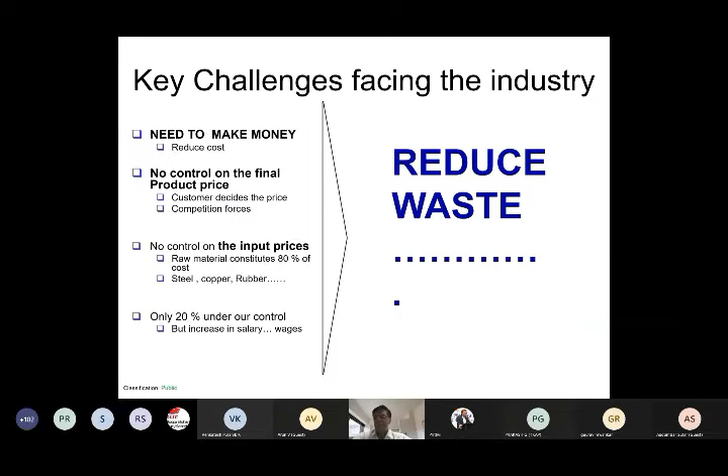The main thing we are trying to say is to reduce waste. In all our areas, in all our work today, how to reduce waste is the key factor we are all working on. So there are different types of waste, starting from today - if you're working from home, underutilization of the employees, overproduction, and waiting time. A lot of wasteful time is in terms of inventory. Transportation - I talked about the transportation cost - excessive movement inside a factory, outside a factory, and a lot of importance not given to motion ergonomics, and of course the quality.

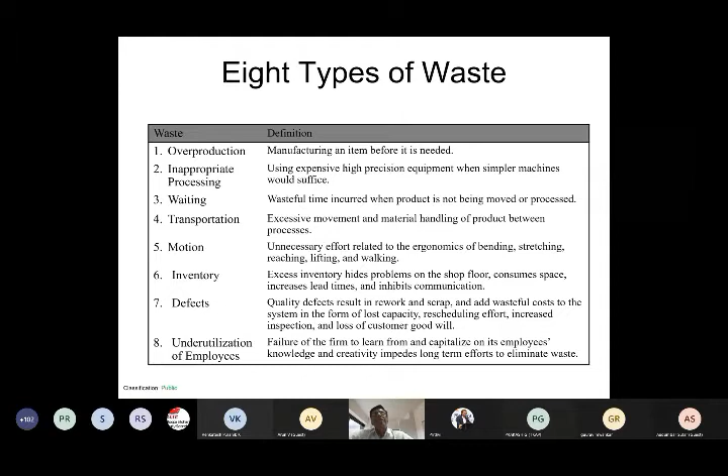So all the waste we need to attack, we need to see how to reduce it. Similarly, what are the types of losses? Losses inside a factory include things which can impede equipment efficiency, like failure losses, startup losses, minor stoppage losses, speed loss, defect rework, downtime, and in terms of production resources, again operating motion loss, logistic losses, and of course tool breakage loss and yield loss.

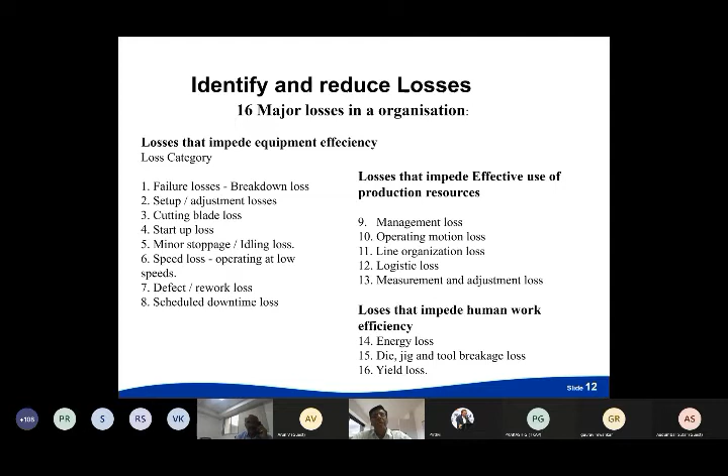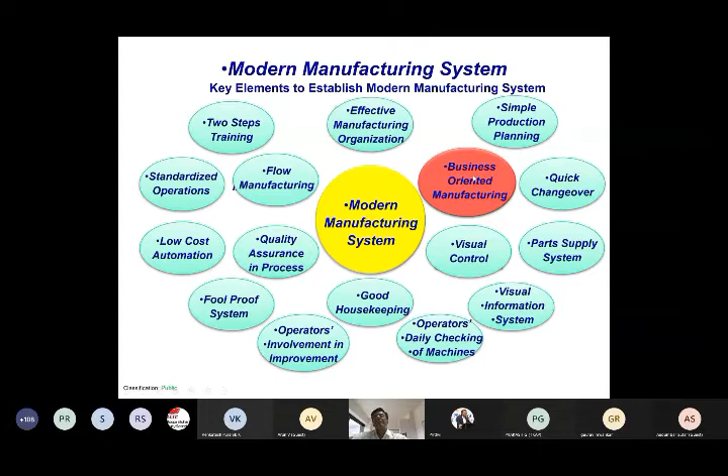So to work on these losses, to work on the wastages, we are trying to talk today. There are many tools available - for example, JIT, we have got Lean, TQM, TPM, SMED, and all the new tools, which are all existing tools, but all are interlinked to improvements, and all are linked to business-oriented manufacturing. I talked about the business of making money. So all the modern systems, whether it's flow manufacturing or low-cost automation, simple automation, quick changeover, visual management, are all towards business-oriented manufacturing. And one such tool is TPM.

So coming back to the challenges in the industry, it's about reduction of waste, reduction of losses, and improvement through 5S by involving total employee involvement and bringing in TPM. So today's topic will talk about TPM and 5S and their implementation in industry.

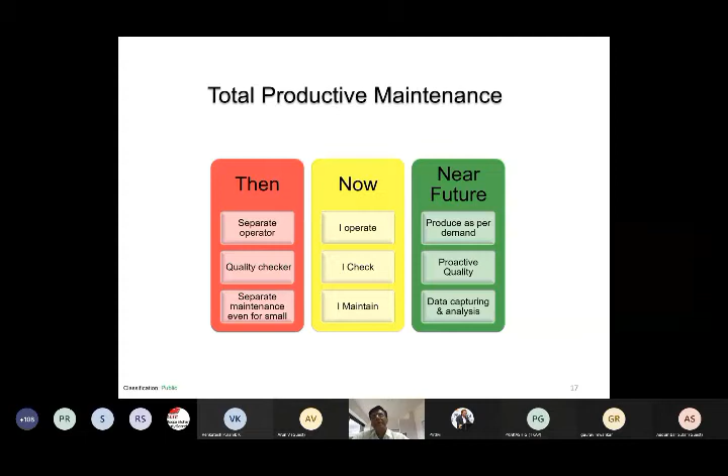So what is total productive maintenance? Earlier there used to be a separate operator, separate quality check, and separate maintenance person even for small improvements. Now it's changing to 'I operate, I check, I maintain' in TPM. In the near future, I operate to deliver as per demand, I proactively check and give quality level, and I maintain by bringing IoT and data capturing. So the change is from separate operator to 'I operate, I check' towards new areas of IoT, but the basic is still productive maintenance or TPM.

This is how we go from now to the near future. Similarly, looking at the 8 pillars, earlier for 5S we had a separate team. Now each area is maintained by an individual and a team. In the near future, shine and 5S business benefits are shown even in 5S itself, so it's important to know there is business benefit including 5S.

In terms of Kaizen, Kobetsu Kaizen, we earlier used to practice it in a basic way. Now it has increased in level, going towards digital and visual KK. That's the change happening in the second pillar.

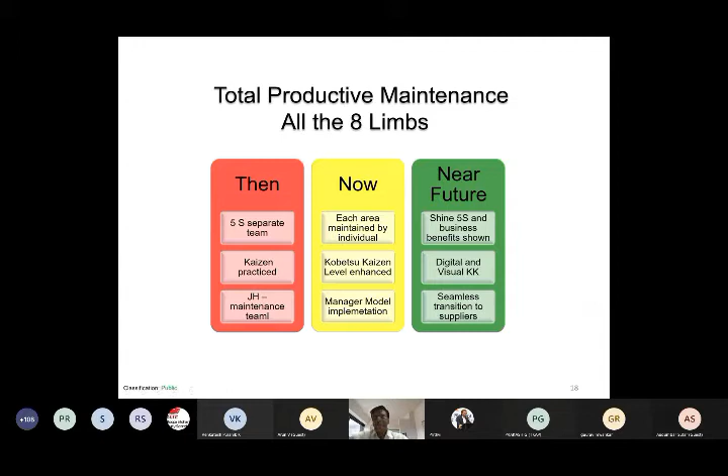Third, in JH at the operator level, involvement of everyone including the manager model, and seamless transition to suppliers, which gives end-to-end benefit. Similarly in planned maintenance, earlier it was done by the maintenance team, now it's done by the operator himself, 'I maintain', linked towards IoT for machine proactive checks.

In quality, the QM pillar, earlier it was the quality staff and inspection for approval. Now the operator does the check, ensures zero defect, and this extends to all suppliers. For new products, we bring learnings from the beginning and incorporate them seamlessly, interlinking with PFMEA and DFMEA.

So what's happening is it's becoming like a system, where we are able to implement, sustain, and then grow the development of the industry itself. In terms of office TPM, earlier it used to be separate from the factory. Now supplier, office, and logistics are brought under TPM and linked with IoT in the near future.

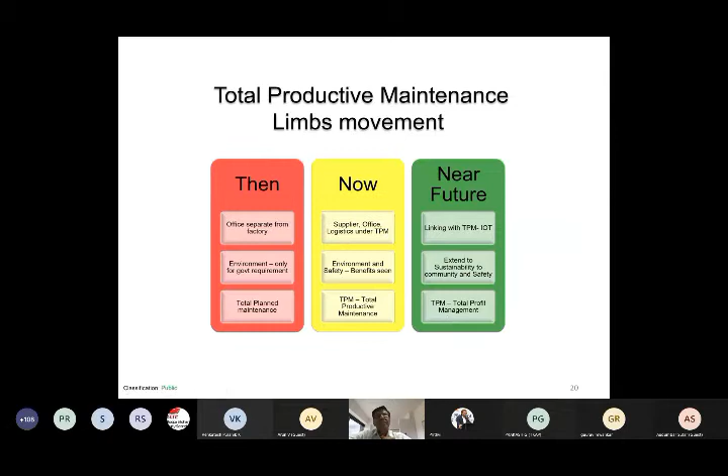On environment, earlier we used to just meet government regulations and we were happy with that. Now environment and safety benefits are seen, and we talk about extend to sustainability for community and safety. And total planned maintenance as total productive maintenance has changed to total profit management. This is the way the entire change in TPM is happening for the future.

Because of this, even the machine tool industry has changed from simple SPMs to flexible chain setups to deliver, from quality control to process capability to zero defect, and from batch production to agility and variety in our lines.

And the next is IoT-based end-to-end improvements, sustaining zero defect, proactive participation in new products, and bringing new technology. I was talking about EV technology and how to bring new technology from the OEMs, and how to integrate TPM, TQM, and Lean to make the Toyota system or TPM-TQ system, and capturing data analysis and improvement to get business benefit.

So I think I'll stop here, and probably Parashuraman can take it to the next level, and I'll come back to you on each pillar of TPM.

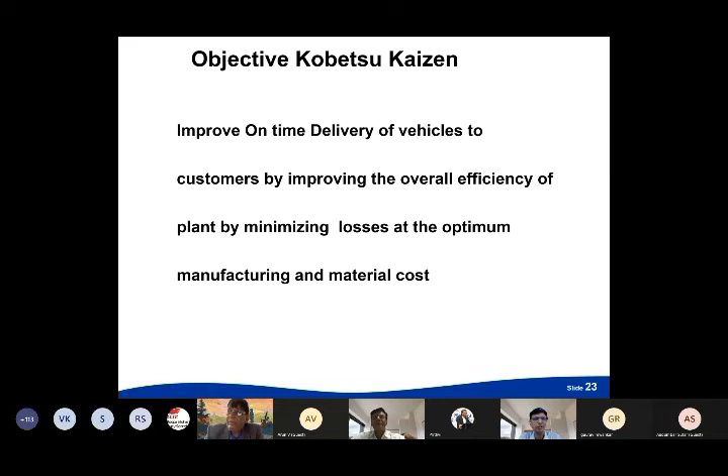Thank you, sir, thank you very much for setting a very good overview of the TPM session. While we got the overview now, to actually make it happen, we need to understand the details of it. So I hereby request Mr. Parashuraman to take over the session, sir.

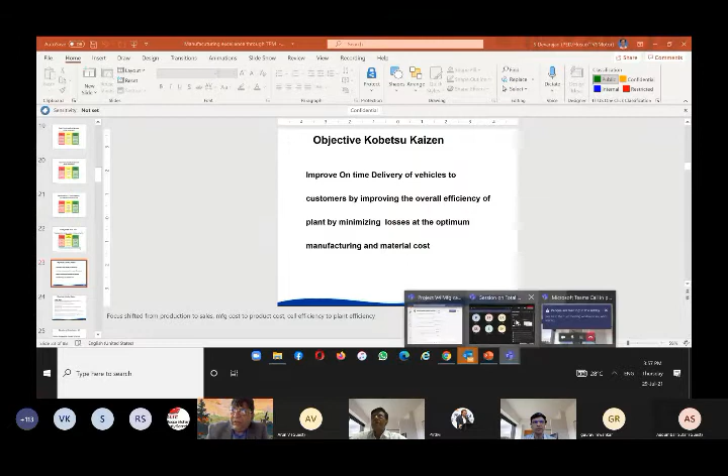I will now start sharing. Just a minute, I think. Yeah, thanks, Hi, sir. Prakash ji. Thank you, Dr. Devarajan, for a wonderful insight. It's made my job much simpler.

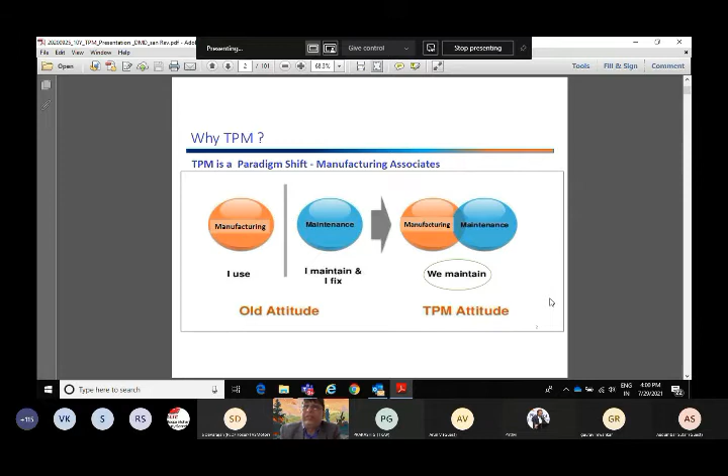So basically, TPM is a method to maximize equipment effectiveness through total employee involvement. As I said, it's a collaborative approach, and basically it means management together with the shop floor production associates and the maintenance team.

You can see the right side - the car as well as the driver, both should be in top shape to win the race. Therefore, the car should be in top condition, the driver also should be in top condition, then you can win the race.

If you look at the synonyms, on top you can see the baby's photo and at the bottom, the machine. So the machine is similar to the baby, and the parents on top are nurturing it. Here, the operators are similar to parents - how the parents take care of the baby, the operators take care of the machines. The role of physician is nothing but maintenance. Whenever there's a problem, diagnostics or problem solving, the physician or doctor enters. This is a major shift in thinking. So what it means is accountability at low cost.

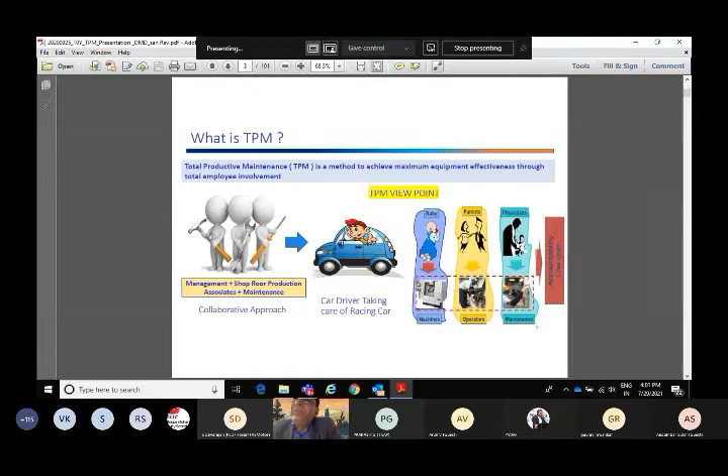So when I look at the TPM evolution, it goes like this. Before the 1950s and 60s, we used to have breakdown maintenance - typically reaction maintenance, whenever the machine breaks down, immediately you call the maintenance guy and they come and fix it up. Then evolved preventive maintenance in the late 60s, so even before a failure, some kind of health checks happened in the machine. It's a kind of preventive mechanism.

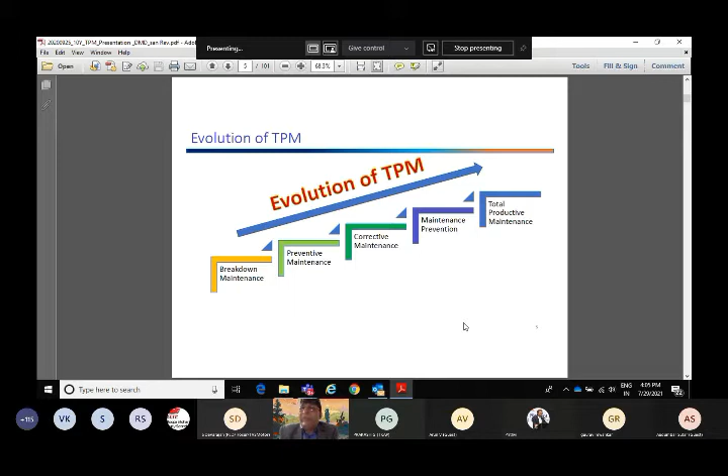The benefits: increased uptime of the machines, increased plant capacity, lower maintenance and production costs, lower defects, and enhanced job satisfaction.

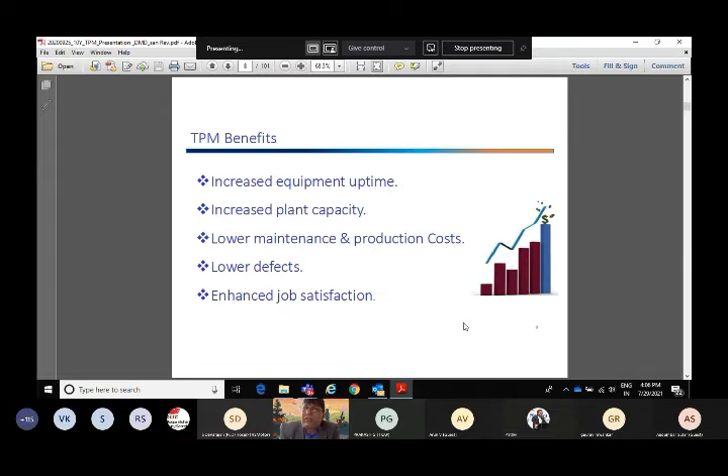I think the single most important thing in TPM is visualization. Everything should be made naked, which means the machines should be completely stripped open and everything is visualized. When you walk through a typical TPM plant, defect rates, delivery performance, daily rejections, supplier quality, machine breakdown rates, MTBF, MTTR - everything is completely visualized.

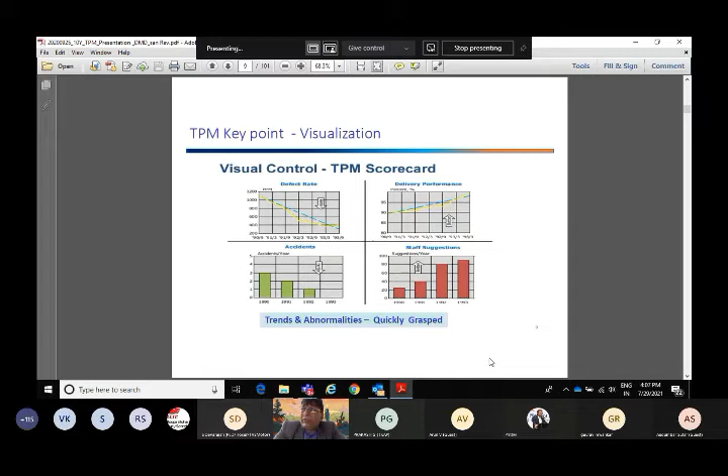Accidents starting from safety, then suggestions - it's an employee participation program. Everything is visualized so that everybody is able to see the trends and take adequate proactive countermeasures. So this is the starting point.

Again, visualization - everything is visualized in the form of pictures and physical platforms. For example, it indicates the direction of adjustments on the right side or left side, where to turn the knob. Quick, safe, and troubleshooting procedures are standardized, with visual controls to improve ease of operations. Everything is visualized, so there's no need to worry about what to do.

It is visual - you can see by eyes, hear by sounds, smell by your nose, touch by your hand. All these things are visualized in the shop.

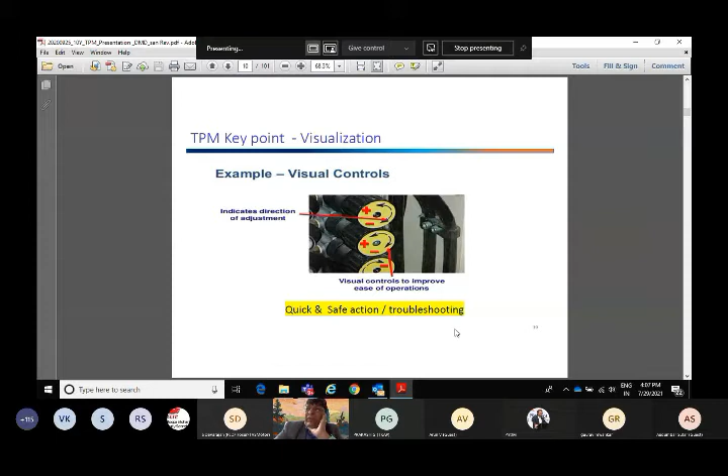I think TPM metrics, equipment losses analysis and OEE - Dr. Devarajan talked about all these losses, he talked about several losses. But in TPM, we talk about 6 big losses: the breakdowns and setups...

Then tool setup losses and minor stoppages. Minor stoppages, we call it chokotei in Japanese. Actually it's not a big breakdown, it's an irritation to the operator. For example, a tool waiting, some kind of coolant clogging, or the door not closing because a chip is entangled. You remove the chip from the door and it operates, but it results in 1 or 2 minutes of stoppage. Or let's say the coolant level is low and has to be topped up frequently because of leakages - that's an irritation, you have to top up the coolant and you lose time. That's what we call minor stoppage.

Then you have reduced speed loss. Speed loss is basically of 2 types: machine speed loss and operator speed loss. For example, the rapid rates G0 in X, Y, Z and the B axis have been reduced, from 50 meters per minute to 10 or 15 meters. I think that's what we call machine speed loss for a period of time.

The operator speed loss is loss of standardized work time. Operators get fatigued, or there are some cultural issues, slow motion operations, or union issues. Many things are collectively called the speed losses by the operators.

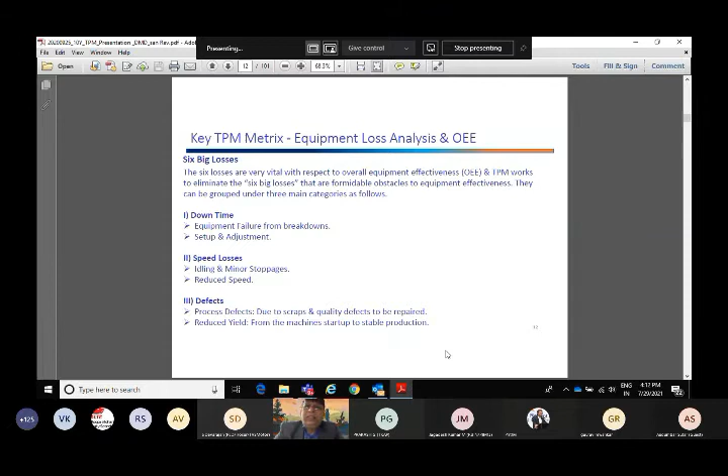Again, this is what we need to understand a little more deeply. I'll come to that later. I just thought I'll give you a big picture. Yeah, the six big losses I just explained. I don't want to touch much upon it.

So improvement goals, as I said, should be zero. Breakdown should be zero. Setup and adjustment losses should be minimal. Should set global targets - we talk about single minute exchange of dies on a global platform. And adjustment losses should be basically zero, and the setup should be in single digits. Speed losses should be zero, and idling and minor stoppages should be zero. Quality defects and rework losses zero. Startup losses should be minimal - according to me, it should be zero.

So OEE is the availability into performance rate into quality rate. As I told in the earlier slide, availability is determined by breakdown and setup time, performance rate determined by idling and minor stoppages and reduced speed losses, and quality rate determined by the quality defects and rework losses and startup losses. So availability is the ratio of the operation time to the loading time.

So loading time is very simple. You have to subtract the coffee time or the planned time. Let us say out of 500 minutes, 10 minutes - 5 minutes and 5 minutes coffee time - 490 is the loading time. So loading time minus whatever breakdown or setups, you subtract it and divide it. That is the availability, as simple as that. I think it's a very simple formula, you don't have to worry much about it.

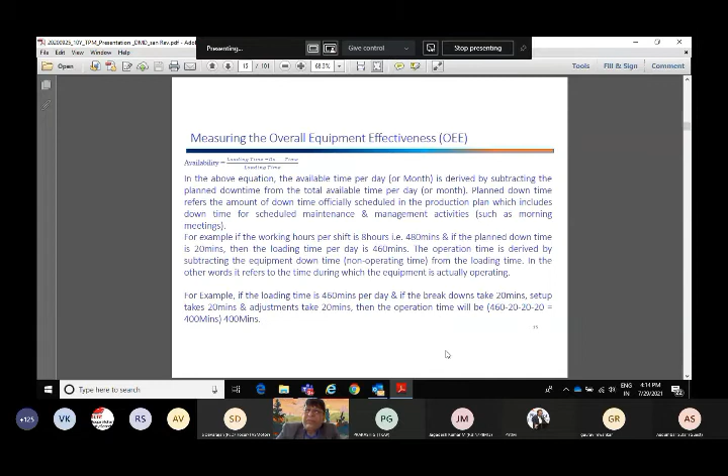So I think I've explained very clearly. I don't think you need any explanation.

Performance rate is the rate of the product of the operating rate into net operating time. Don't worry about it, it's a simple formula - it is the multiplication of operation speed rate and net operation rate. See, I've given the formula here.

Ideal cycle time divided by actual cycle time is equal to operation speed rate. So originally at showroom condition, when you set up the machine for the first time, you set a cycle time of 2 minutes. The cycle time has increased to 3 minutes because rapid traverse has increased and machines have slowed down. So your operation speed rate is 2 divided by 3, 67%, as simple as that.

The next factor is net operation rate, which is output multiplied by actual cycle time divided by the loading time. It's a very simple formula. What I'm trying to say is imagine this denominator is nothing but...

490 minutes is already available, minus breakdowns and setup. I told you another 40 minutes we lose. So the denominator is nothing but 450 minutes. But even if you put 450 minutes, having subtracted breakdown and setup, and the numerator you multiply the actual output into actual cycle time, still this is not 100%, or still it is not 1.

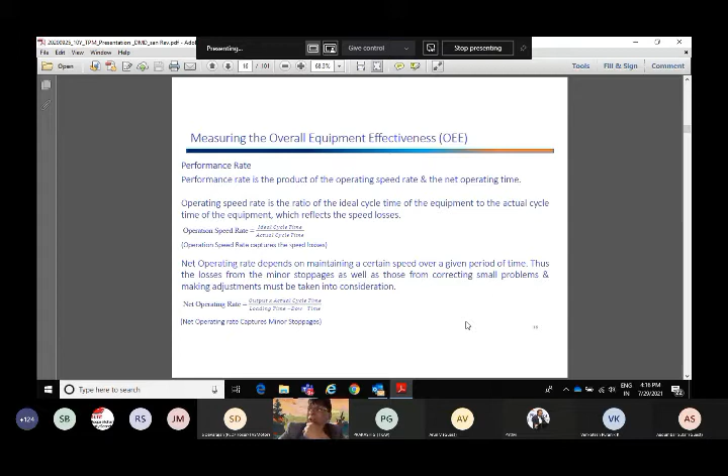I think you will have a lot of doubts. If you have doubts, please ask me.

If you really look at this formula - multiplication of operation speed rate and net operation rate - actually if you multiply, the actual cycle time and actual cycle time get cancelled, one in the numerator, one in the denominator. So then the performance rate is nothing but output multiplied by ideal cycle time, divided by the net available time. That means it captures minor stoppages and speed losses.

I think if you have understood this equation, it's fantastic - you achieved everything. But to understand this equation you may not be very clear, feel free to ask me, I can tell you later also. Did you understand this, gentlemen? I'm sure the TPM people practicing TPM should understand this. Okay, let us come to the Q&A later. Let's go to the next slide. Please note down your doubts.

OEE is multiplication of quality rate, which is simple: output minus number of defects, divided by output. Ideally, whatever you produce, say 100 numbers, all 100 should be okay. If 2 numbers are defective, your quality rate is 98%. Therefore, OEE is equal to the multiplication of three factors: availability into performance rate into quality rate. This is a beautiful formula.

And quality losses we could dramatically reduce. Today, I'm very happy to see that Toyota Kirloskar Auto Parts is one of the best global plants - they have achieved almost gold in every area in the eight pillar activities.

I can assure you, if you focus on this OEE, it's a visualized, measurable tool to management - you can capture all six losses in a single formula. Unlike TPM and other areas, this is measurable and visualized. OEE improves by 1%, the entire efficiency and profitability of the organization increases, visible to top management, and you can see a very clear-cut growth in the top line and bottom line. Next, please.

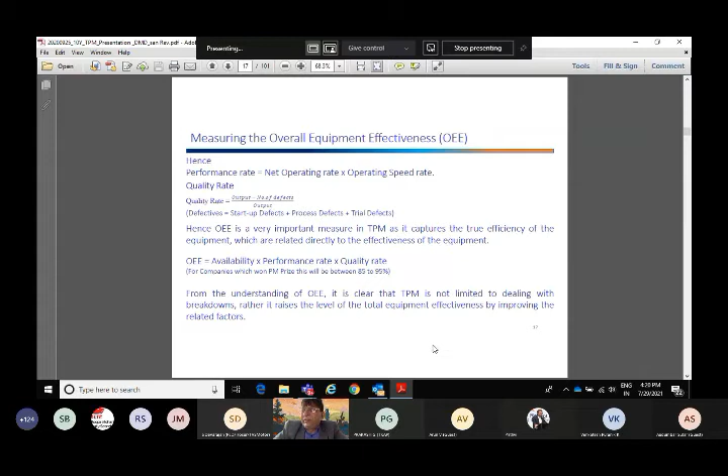Let me take this example. Let's say loading time is 460 minutes in a typical 8-hour shift. Let's say no coffee time, tea time, they've given 0 in the example. Downtime and setup times are 20 minutes, tool change time is another 20 minutes. So what is the net operation time? It is 460 minus 20 plus 20 plus 20, which is 400 minutes. Let's say ideal cycle time at the time of setting up the plant is 1.5.

Due to some increase in G0 or rapid traverse in X, Y, Z and B axis, it has increased to 1.8 minutes. The output is coming to 200 numbers per shift. The number of defects is 8 parts. So what is the availability? Availability is operating time 400 divided by loading time 460 minutes into 100, which is 86.95%.

Operation speed rate is ideal cycle time by actual cycle time, 1.5 by 1.8, which is 83%. Net operation rate is actual output multiplied by the actual cycle time divided by 400, which is 90%. The performance rate is multiplication of operation speed rate and net operating rate, 83 multiplied by 90 is 74%. Quality rate is 200 minus 8 divided by 200, which is 96%.

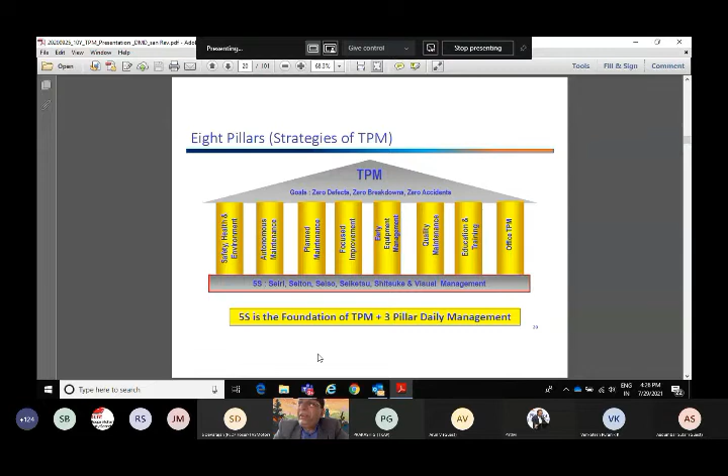The power of this is unbelievable, so we can learn more through a separate session. The 8 pillars are: safety, health, autonomous maintenance, planned maintenance, focused improvement, early equipment management, quality maintenance, education and training, and office TPM. Let us talk about them briefly.

As I said, the foundation is 5S. I think let us go to the next slide. Okay, I don't have to talk about this, you're all champions of 5S. I will skip this slide because this is the foundation of any workplace.

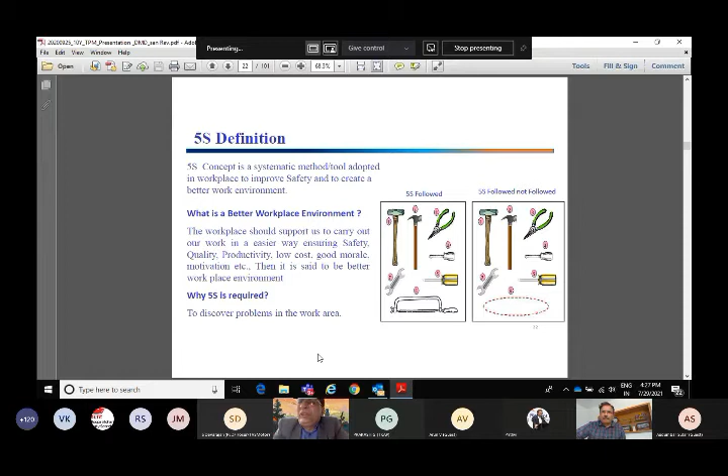Just to tell you, to do this 5S, you should first do 1S: what is not required, please throw mercilessly. If you don't do that, you will never be able to enter even 2S. The entire steps will be a failure.

This is the power of management - right from the top management, you should have the guts to ensure that what is required and what is not required is identified, and not-required things should be thrown out, because anything not required is muda. It occupies space, occupies management time, you need to maintain them, and it creates so much confusion.

Second, whatever is required, please systematically arrange them - that's very, very important. Third, not only keep required things arranged, you should keep them spick and span, clean, tidy, in good condition. Not only cleanliness, you should standardize - there should be standards for your workplace: what should be the cleaning levels, how the racks should be, what should be the height of the racks, how should be the retrieval mechanism.

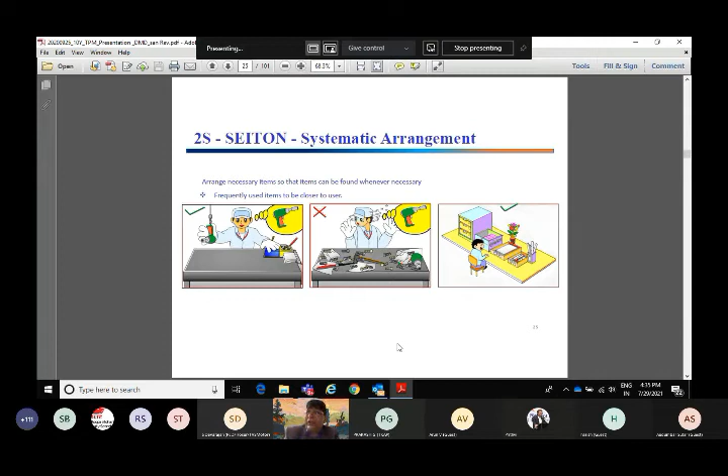Clean up - keep workplace and surroundings clean. Clean waste and dirt. Dirt is generated due to oil spillage from equipment; throwing unnecessary packing materials will also result in accumulation of dirt. I think dirt is the root cause of several things - it is the root cause of corrosion. Dust covers many problems, so our challenge is the root cause, which is dust or dirt. How to eliminate dirt? Ultimately there should not be any cleaning.

It should be natural, the best is no cleaning. Why should you clean? Cleaning is a muda - first step is to clean. Ultimate destination is to eliminate cleaning so that dirt is completely and fully eliminated.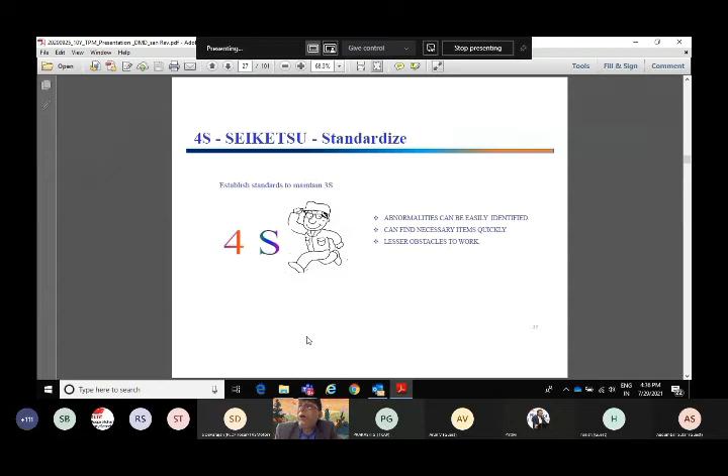Standardize. The most important thing is abnormality should be visualized, therefore rules should be there for everything, or standard should be available. For example, if I have a glove stand for keeping the gloves, what is the maximum and minimum - that is the kind of standard. For storing papers, what is the maximum, minimum, to what level should I store? Once the rules and standards are available, it's much easier to follow, no obstacles. And finally the fifth is self-discipline.

Rules are easy to understand, follow, and maintain. There is someone to check whether everybody is following the rules or not, but ultimately it should become self-sustaining. Nobody should check - I should be checking myself. If somebody checks me, it is a shame on me. In fact, in Japan, if somebody tries to check the other person, it is like a sad phenomenon - it's an insult to people.

There is no second conductor in the bus. People buy their own tickets, people do their own checking. I think that is the best way — that is the next level of Shitsuke, beyond rules.

So the benefits of 5S, I don't have to tell you: zero accidents, a great workplace, happy feeling, and improved productivity. Let me tell you, wherever 5S is established, that place will reach global excellence. This is a real eternal truth.

I can tell you where it is sincerely practiced, not like ISO. ISO means — I always say — I stay in the office before the day of the audit, and the auditor goes away, immediately the mountains of problems will come. So ISO, no, not ISO. Every time it should be like showroom condition, not only when the auditor comes. I think that is the ideal situation. Do you agree with me?

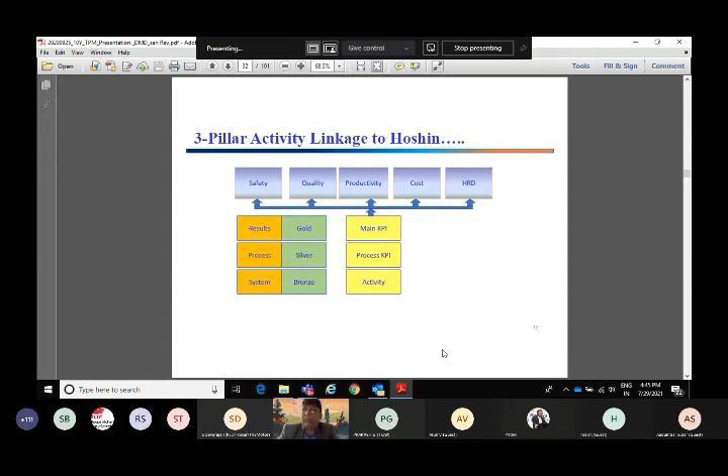Safety first, we say quality must. And if you look at our plants, even starting from the commutation bus, all the buses have seat belts installed. Safety is the mantra, safety is the order of the day. Everything starts from safety - if there is no safety, there is no Gemba, no operations. I think health and environment are equally important.

Then the second pillar is autonomous maintenance. Autonomous maintenance is oiling, lubrication, and cleaning by the shop floor operators in conjunction with the maintenance team at the elementary level. Then you do basic maintenance activities through the 7 steps of autonomous maintenance, which I'll touch upon later.

Then you have the planned maintenance activity, which is very important. It is a huge improvement of planned maintenance activities through which you're able to improve your mean time to restore and mean time between failures, MTTR and MTBF, and you race towards the global targets.

Then focused improvement - by improving the fixture or the jig or the physical mechanism of the machine, you're able to enhance the machine efficiency. Then the fifth pillar is early equipment management, which means front loading of the problems.

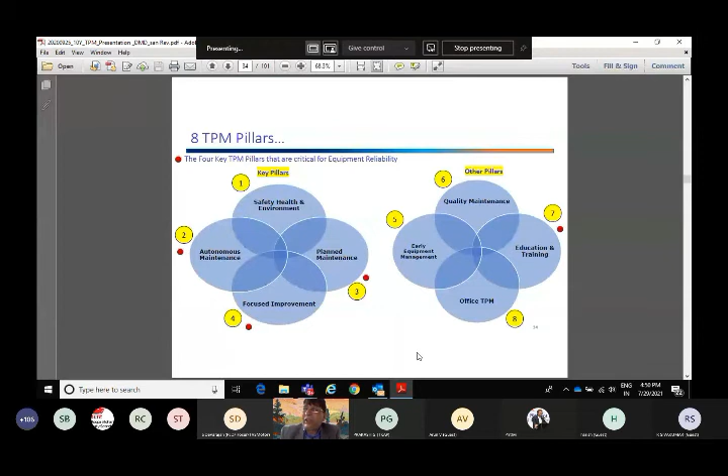We call it Gyokaku in Japanese. Gyo means office and kaku is reforms - office reforms or business reforms. So Gyokaku, we have taken nearly 3 years to implement, but it was a great journey. I can talk about it much later.

Next slide, please. So safety and health, zero accidents, zero incidents. I think this is the base of everything. Everything is visualized - a lot of slogans, posters, work motivation programs.

Every rule is visualized, safety rules. Eyes check - left okay, right okay, straight okay. No telephone while walking. All these things are visualized. And safety mind is very, very important, starting from zero accidents. You can give any number of countermeasures for safety, but if you don't have safety in mind, nothing is going to work. Therefore, how to develop safety consciousness - that is the key.

In our Toyota culture, we have a gate - a safety gate. On the front side, it is written: safe work is the door to all work. Let us pass through this door always. Safe work, reliable work, and skilled work. On this front entrance, the back side says, thank you for following safety.

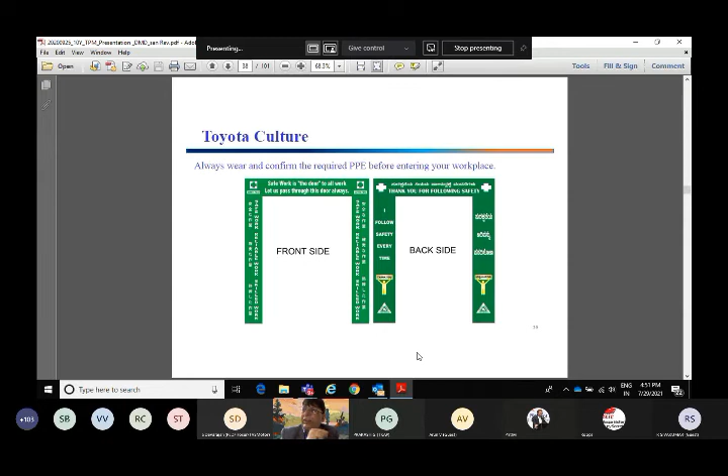Follow safety rules every time. Because if we cannot have a safe workplace, accidents are going to happen, quality problems are going to happen, customer issues are going to happen, and you are going to have IR issues also. There will be a lot of chaotic frustration across the plant. That is for sure.

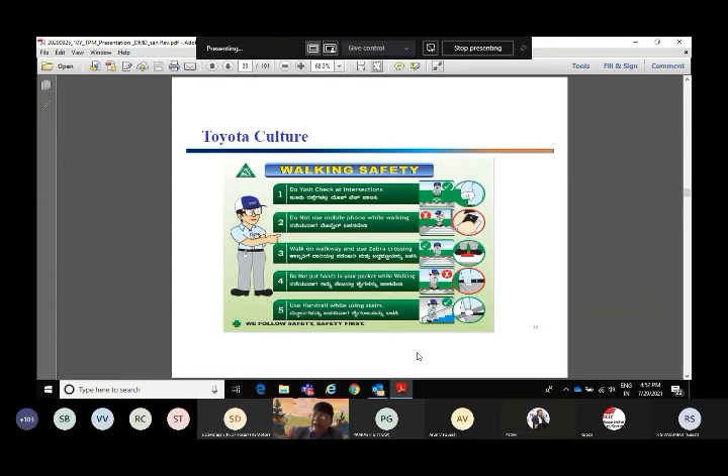Walking safety - Yoshi check at intersections. Right okay, left okay, before you cross all the points. Do not use mobile phone. Walk on the walkway and use zebra crossing. Do not put hands in your pocket while walking. Use handrails while climbing. This is the standard safety rule in any Toyota plant anywhere in the world - a mantra all of us have to follow everywhere.

An accident is an unwanted event which may not create an injury, but it can cause damage, or it can create an injury, or both. Accidents can happen due to several reasons: lack of concentration, less skill, urgency, carelessness, negligence, worries, fatigue, illness, not following PPE safety rules, overconfidence, etc.

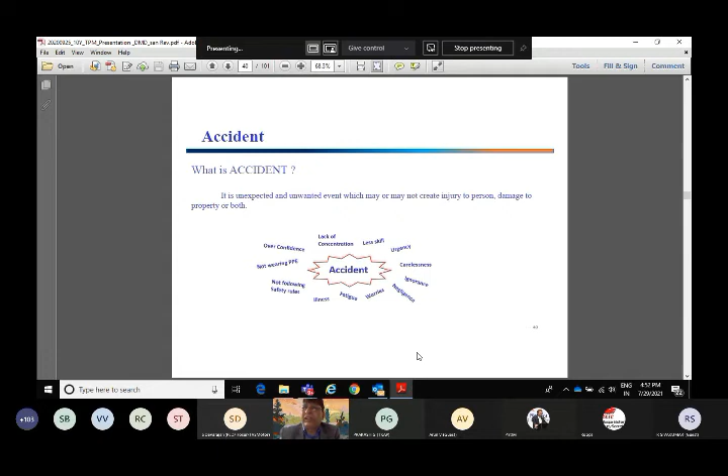Accident causes may be due to two reasons: unsafe condition and unsafe action. If you really look at it, 80% of accidents happen due to unsafe action, 18% due to unsafe condition, and 2% due to natural calamities - huge wind, water coming suddenly, all this stuff.

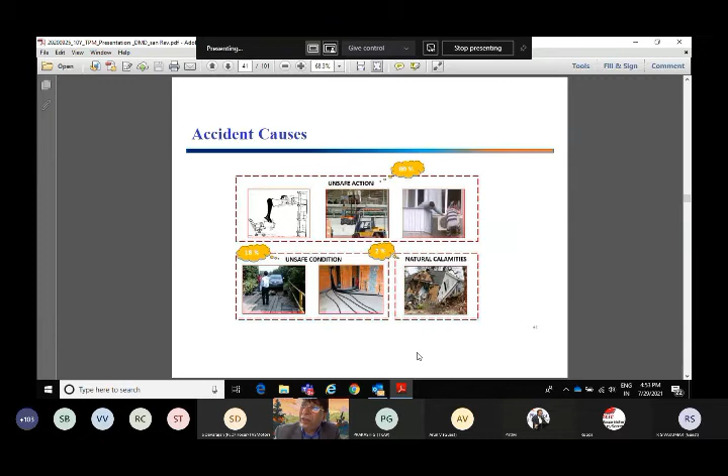Next, 6 big causes, so we do the Kiken-Yochi training. Kiken is predicting the danger or forecasting the danger before any activity, planned or unplanned, is done. We do the KY training. We check whether everything is okay, then we predict the danger, we put the countermeasure, then there is shadowing by the senior, then the actions are written, then the action is started. This will save a lot of accidents, and 80% of what I talked about is coming from here.

KY training is very important. There are typical examples of KY training. Why do accidents happen? Look at it. The person is trying to climb and he'll fall into that pit hole, and all these things are unsafe acts.

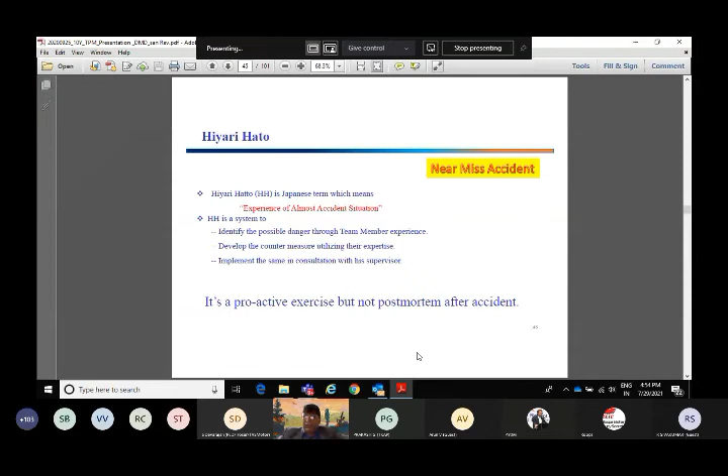Hiyari Hatto is a near-miss accident. It is not an accident, almost a near-miss accident happened. Therefore we identify near-miss accidents, we encourage Hiyari Hatto suggestions. What are all the near misses happening? And if you can kill the near-miss accidents, then you can kill the probable minor accidents. If you can kill the minor accidents, you can kill the major accidents, the Heinrich triangle. So Hiyari Hatto near-miss is the base, and we encourage people to point it out.

So lockout-tagout is very important. Lockout training where we have a lockout and tagout system. Before entering a machine, these lockouts and tagouts are used so that the controls are completely switched off, so that even if people enter the machine, there is no accident. So this is again a big system by itself, I'm just touching upon the macros.

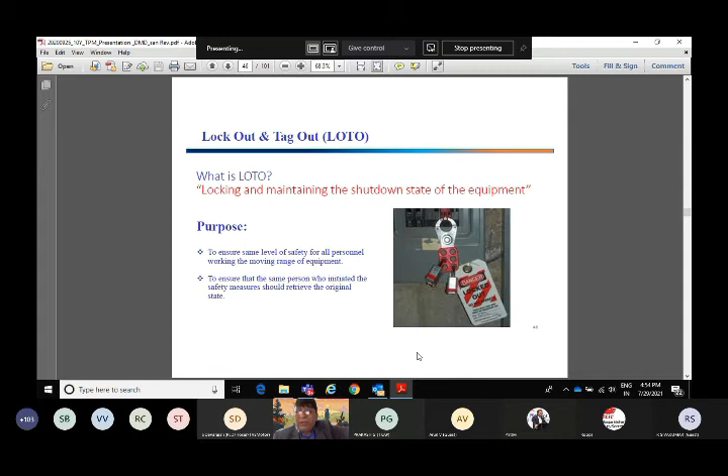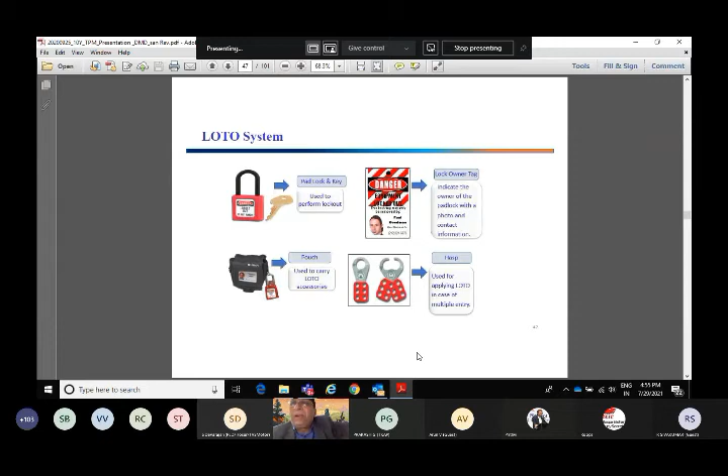So this is a lockout-tagout system where different types are there, where multiple people are involved or a single person is involved, the top and bottom.

And again, fire is a combination of three elements: oxygen, fuel, and heat. So presence of all three elements will result in fire. Therefore, each one of them we have to eliminate and prevent. So these are all the various types of classifications of fire. I don't have to touch upon this.

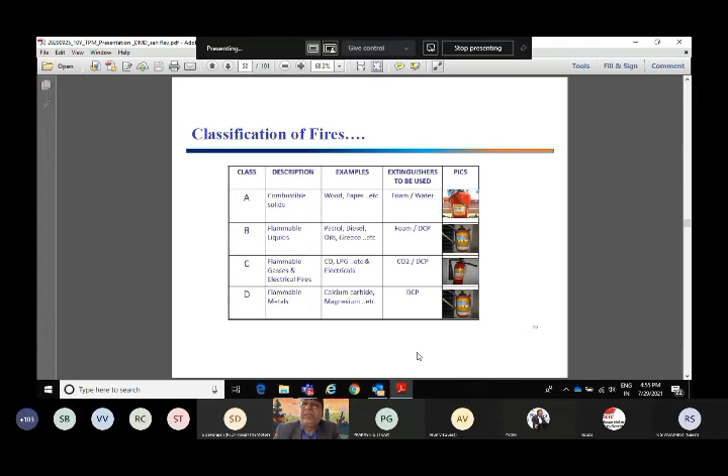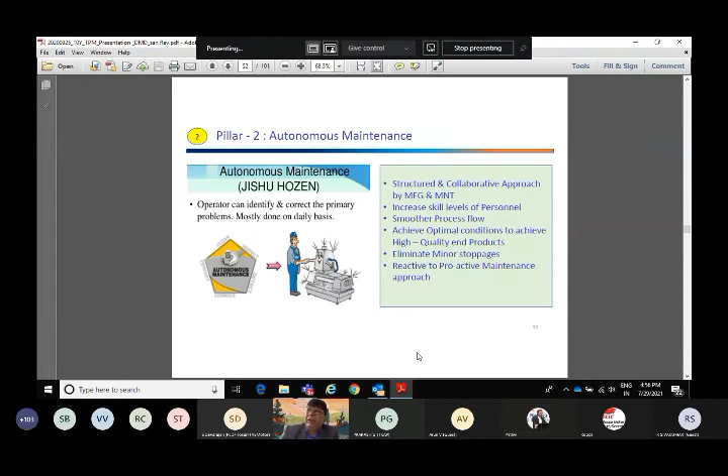Then I'll come to autonomous maintenance, second pillar: oil, lubrication, cleaning. This is nothing but Jishu Hozen, the base of maintenance by operators as part of JH activity. This is a structured and collaborative approach between maintenance and manufacturing, increasing skill levels of personnel, smoother process flow, achieving optimal conditions for high quality products, eliminating minor stoppages, and a reactive to proactive maintenance approach. This is very, very important.

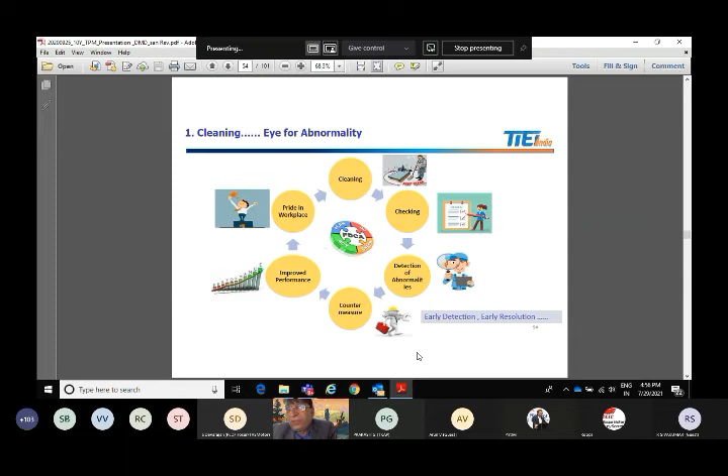Then basic autonomous maintenance steps: cleaning, oiling, and lubrication. As I said, cleaning leads to checking, checking leads to detection of abnormalities, leads to countermeasures, leads to improved performance, and leads to pride in the workplace. And this is a positive PDCA cycle, it starts rotating, leads to early detection and early resolution.

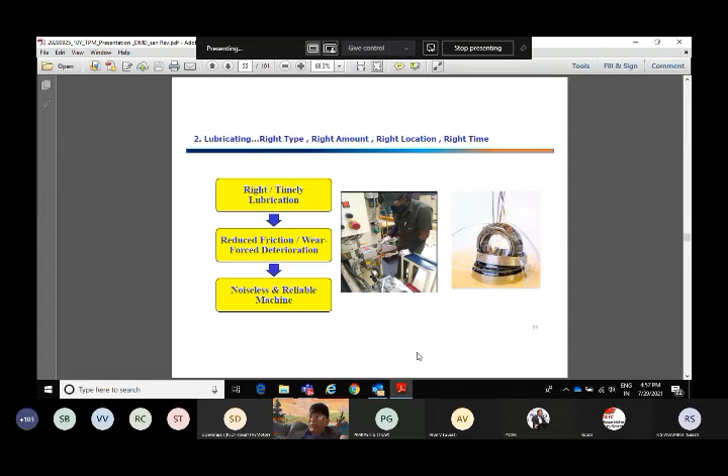And lubrication, right place and timely lubrication, results in reduced friction, wear-forced deterioration leads to lesser noise and a reliable machine. There are always two types of deterioration: force deterioration and natural deterioration. Natural deterioration is due to natural wear and tear, but force deterioration happens due to lack of lubrication, oiling, cleaning, and lack of daily maintenance. Therefore, this force deterioration will result in early failures of machines. By killing the force deterioration through autonomous maintenance, you can extend the life of the equipment.

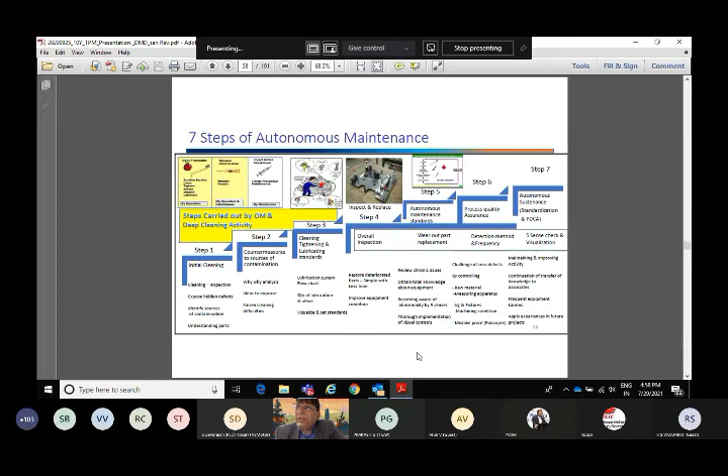So the 7 steps of autonomous maintenance, I don't want to touch upon in detail because this itself is one full session. But step 1 is initial cleaning, step 2 is countermeasures to sources of contamination, step 3 is cleaning, tightening, and lubrication standards, step 4 is overall inspection after cleaning, step 5 is wear-out part replacement based on autonomous maintenance standards, step 6 is detection method and frequency of detection, which is basically process quality assurance, and step 7 is autonomous maintenance sustenance and PDCA, using all the 5 senses and visualizing all these activities so that it becomes a self-sustaining activity. So these are the 7 steps of autonomous maintenance.

So again, a deep cleaning.

I think deep cleaning is not just cleaning. You go deeper and deeper and get into so many problems, and you detect issues like a bearing rattling, a bearing scratched, or a bolt broken. Many things you can discover and replace at an early stage. This deep cleaning has given tremendous results, and it is the primary step to restore the machine to its ideal condition, the showroom condition when it was first established.

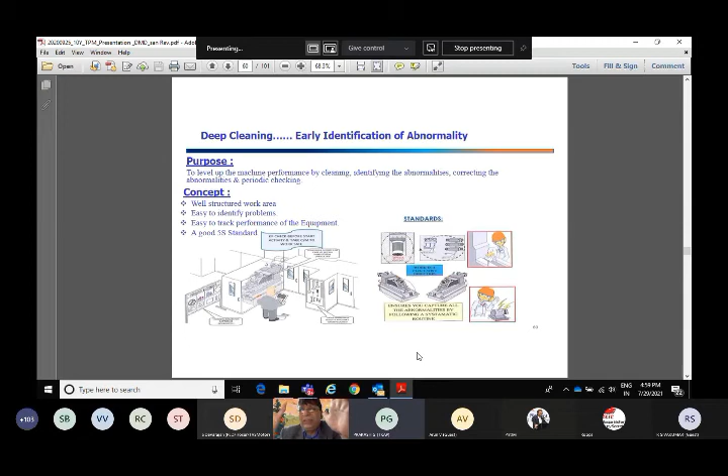I think this is a big subject by itself. We can talk on deep cleaning for one full session. Just understand the word deep cleaning, it is much more powerful and meaningful.

I think ultimately, cultural development is fundamental skill training on machine elements, on-the-job training. It improves relationships, improves working together, improves skills, and the ability to correct minor stoppages.

So for skill up, there are 5 steps. Level 1: able to do deep cleaning with do's and don'ts. Level 2: can do deep cleaning and periodic checks and find abnormalities. Level 3: can solve minor abnormalities. Step 4: can teach others. Step 5: able to sustain and take it to the next level. So there are various levels of deep cleaning activities.

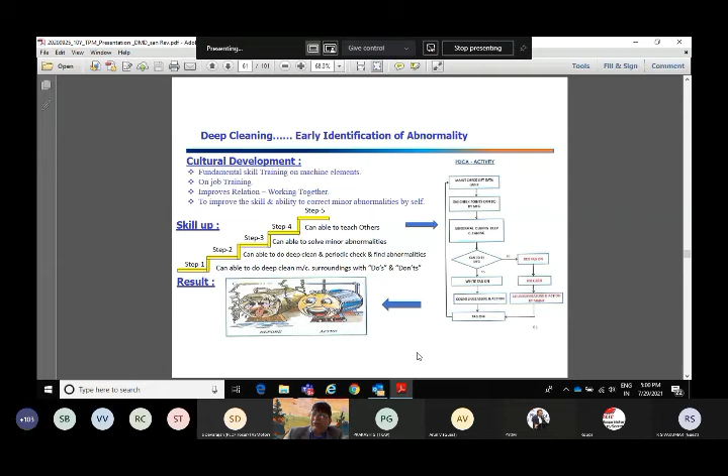There is a system called tag on, white tag and red tag. Red tag is when, during deep cleaning, you detect problems. Some problems can be solved by manufacturing themselves, so you put a white tag. Some problems cannot be solved by manufacturing, so you put a red tag. This is called the tag on and tag off system, and it's part of deep cleaning and maintenance activity.

So deep cleaning activity leads to early detection of abnormalities. For example, you can see coolant accumulated at the axis ball screw, chips accumulated at the axis ball screw, or a solenoid DIN connector that came out. All these are results of deep cleaning.

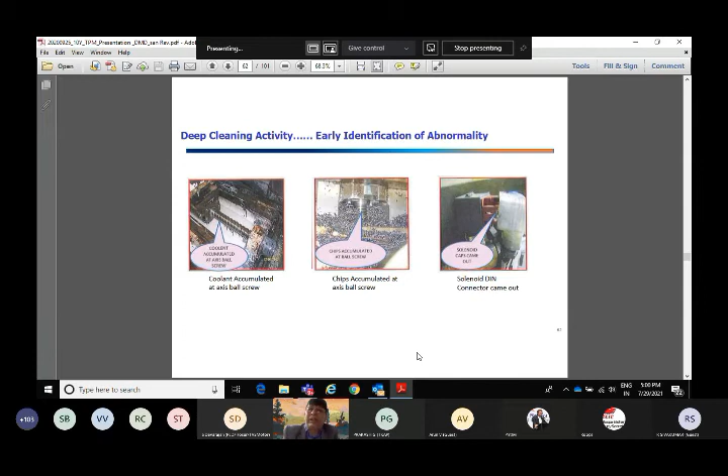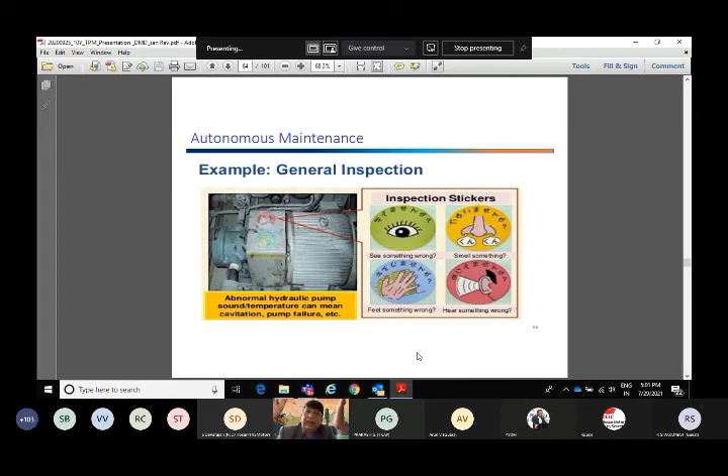The whole idea is that visualization is the mother of TPM. Everything is visualized. For example, we put an eye sticker at a particular place, meaning see with your eyes. Some place you put an ear sticker, meaning listen for sound there, any abnormal sound. Then a hand sticker, touch and feel for anything abnormal. So hearing, touching, smelling, seeing, all represented by nose, ears, hands, and eyes stickers. You can see all the stickers, what position people should stand in, and what they should observe. Everything is standardized, everything is visualized.

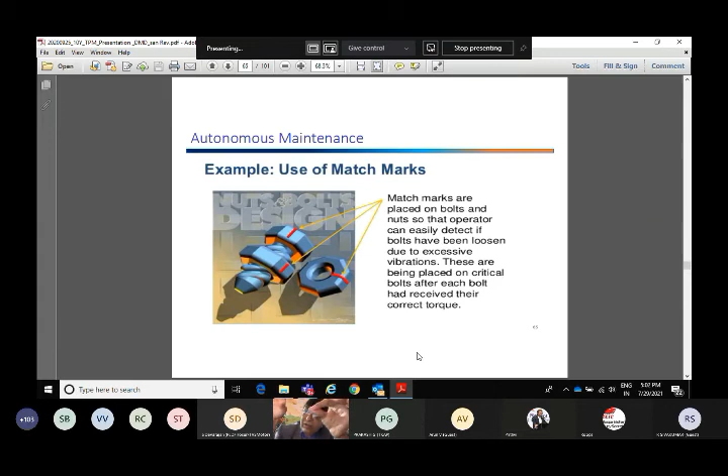There's also a match mark for the bolt and nut. If anything is displaced, you can immediately visualize it. This marking is done very meticulously, and this discipline is very important. Any mismatch immediately shows that the bolt and nut has loosened.

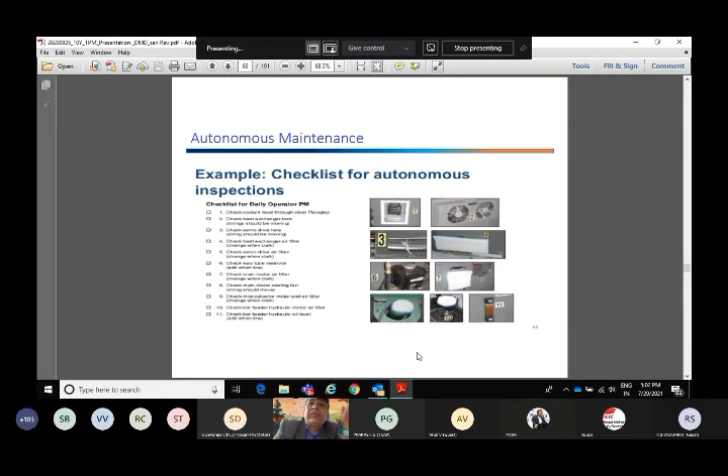So checklist for autonomous maintenance. You should have a checklist for PM where a detailed checklist is there: check the coolant level, check the heat exchanger fans, check the servo drive fans, check the exchanger air filters, and so on and so forth.

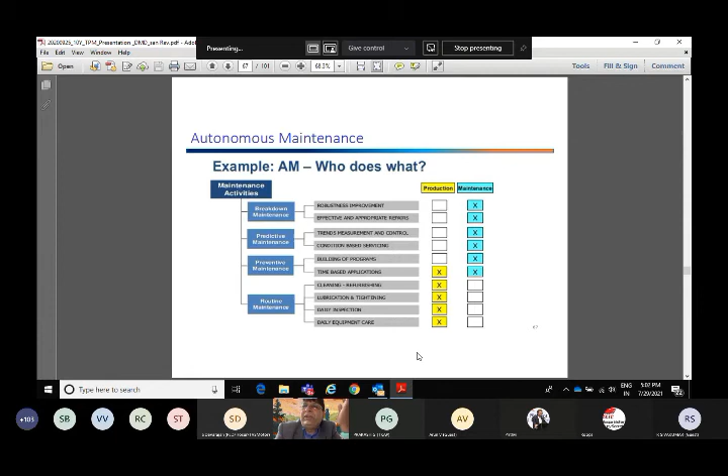Then again, activities, who does what, is it manufacturing or maintenance? For example, breakdowns and robustness improvement are maintenance, effectiveness and appropriate repairs are maintenance. Routine maintenance, cleaning, refurbishing are manufacturing, lubrication and tightening are manufacturing. Like that, it should be visualized.

So a stage-wise approach. We have various stages. First, train the associates on basic maintenance activities. You have to select a model machine, select the model line. Then Yokoten, meaning horizontally deploy. Once you complete the model line, make it perfect, learn from that, and standardize that particular line. Then you can horizontally deploy to other lines. Don't try to do many things simultaneously, that's a waste of time, the biggest Muda. Focus on one area, complete it, learn from it, then reflect it to other areas.

Planned maintenance is the third pillar. This is to prevent deterioration, with inspections to measure deterioration, regular operating checkups, and early treatment to correct the defects of deterioration. Basically, preventive maintenance.

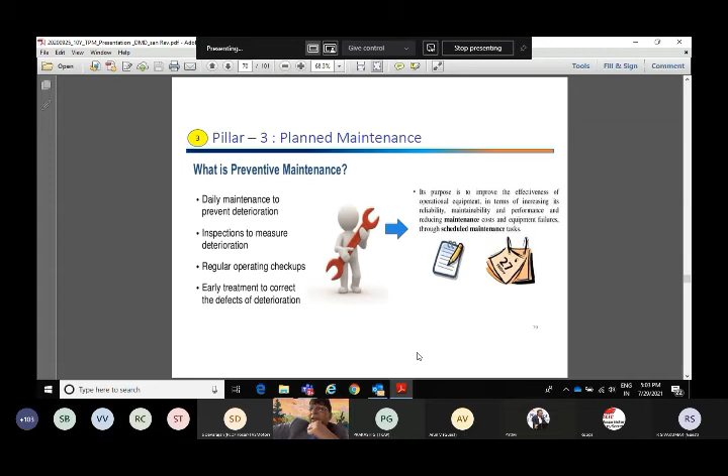Preventive maintenance is health management for machines, so daily prevention, daily health checkups, and early treatment. There are various ways for what we should check daily, through daily maintenance, cleaning, checking, lubrication. Then health checkups can be done periodically through routine inspections and operating checks.

Early treatment is restoration of deterioration. Whenever you find an abnormality, you have to replace or bring it back to the original ideal condition. That is early treatment, or restoration to original condition.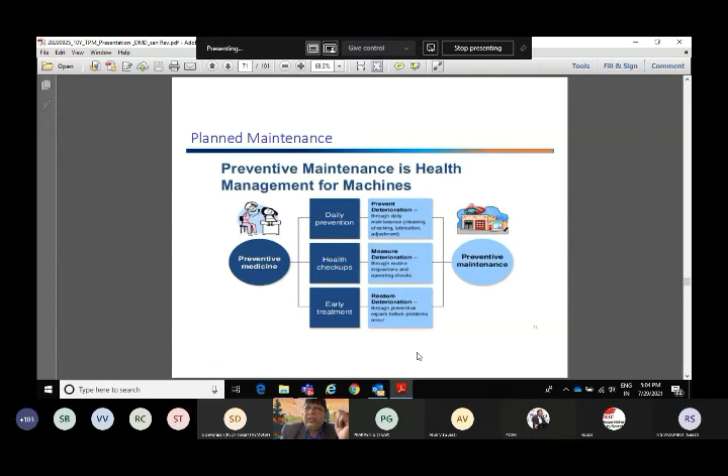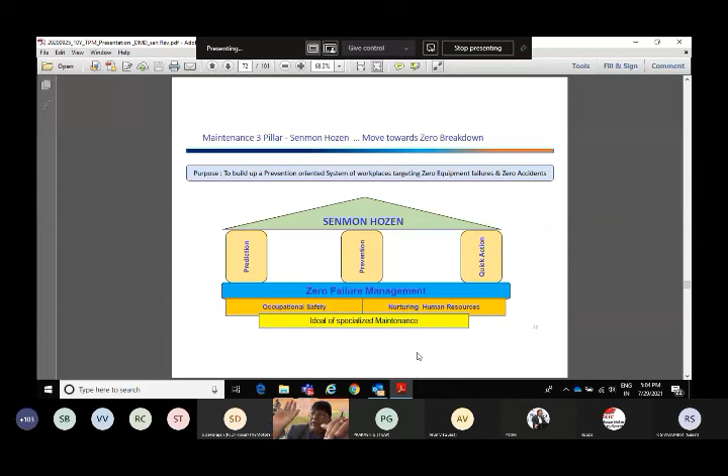These are all the steps of daily maintenance, I don't have to tell you. Then I talked about Senmon Hozen, which is the maintenance third pillar, is to build a prevention-oriented system of the workplace targeting zero equipment failures and zero accidents. There are three steps in zero failure management, focusing on occupational safety and nurturing human resources: prediction, prevention, and quick action.

If you look at prevention: establishment of good facility, improvement of key facility, prevention of malfunctions and recurrence, improvement of good facility - all these are prevention. Prediction means discover before and correct - manufacturing, autonomous maintenance support, periodic and quantitative maintenance, predictive maintenance, science management. All these things are predictive in nature.

And action is to promptly correct - prompt support for repairs of sudden failures, spare parts management, improvement of maintenance skills.

How to make quick repair? I think there are Q6 points. I will just leave this, go to the next.

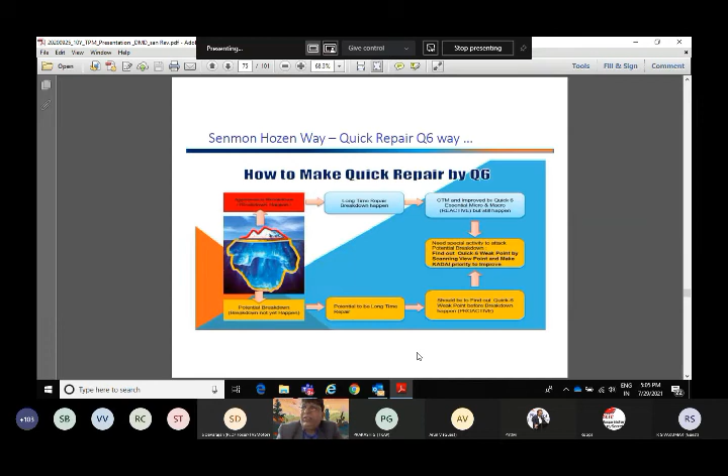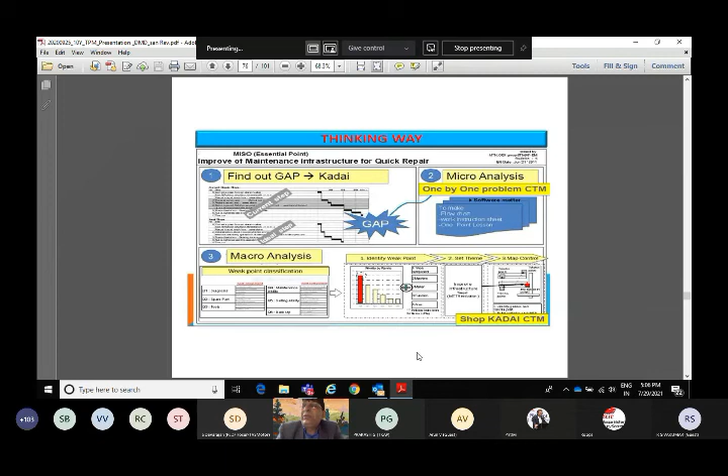Improve maintenance infrastructure for quick repair. Basically, find the gap between the current situation and the ideal situation, understand the gap, analyze the problem, identify the weak point, then set a theme and improve. Something like an A3 paper of problem solving you have to make for improvement themes.

So I talked about Q6. Q6 is when problems happen, how to quickly fix it. This is all 6 bibles, I would say, 6 commandments.

Q1 is diagnosis skills - human machine interface, drawing, manual. Q2 is spare parts - on hand, ready to use, storage condition. Q3 is tools - shop tools, special tools, personal tools, etc. Q4 is maintenance ability - replace, recovery skill, working environment, etc. Q5 is setting ability - adjustment, calibration, data setting, quality concern. Q6 is backup - switching time, only indicate have or have not, or backup machine. All these 6 Q's are very important, and you have to establish the systems and train people on all the Q6.

Let's look at the example. When the breakdown happens, Q1 comes into picture - diagnosis. Then once the problem is detected, Q2 plus Q3 - spare parts or tools - how to solve the problem. Then Q4, maintenance ability, how quickly you can set it right. And then setting ability is again Q5. Then again, backup is at Q6. The entire thing, backup is required. So look at this whole correlation.

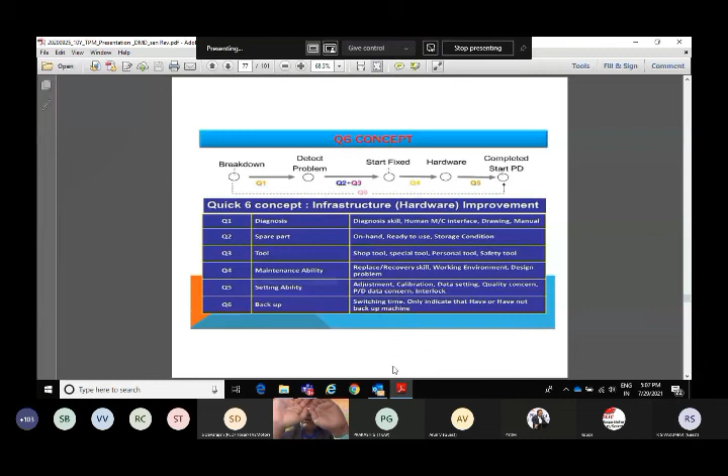I don't want to elaborate on this, you can go through this. Focused pillar 4 is focused improvement.

This is nothing but Kobetsu Kaizen, what Dr. Devarajan talked about - individual or focused Kaizen. Kai means change and Zen means good. The principle behind it is small improvements lead to a major improvement - small drops of water make a mighty ocean.

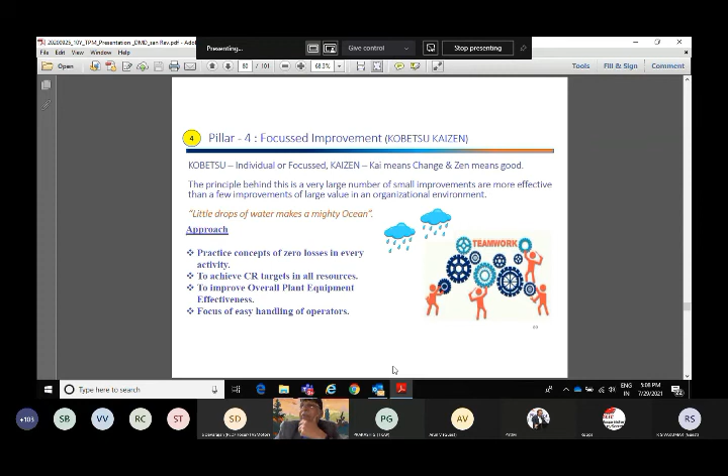Practice concepts of zero losses in every activity. Achieve CR targets with all the resources - CR means cost reduction targets. Improve overall equipment effectiveness, focus on easy handling of operators, handling of operators. It's teamwork ultimately. Then early equipment detection, early equipment management is front loading of problems I talked about earlier - how the problems are visualized.

The last pillar is quality maintenance.

So here basically we established a quality maintenance system, establish zero defect conditions, check and measure conditions periodically, and ensure precision geometry like spindle, clamp, force, vibration, backlash, runout. All these things are monitored and visualized. Today we have IoT, so all these things are dynamically seen, allowing early detection and early resolution. We also give this feedback to the supplier sitting in Japan or some other place. We can order spare parts, keep them ready, monitor trends, and predict possible failures. Then you can look at improving those spare parts or changing them. All this can happen.

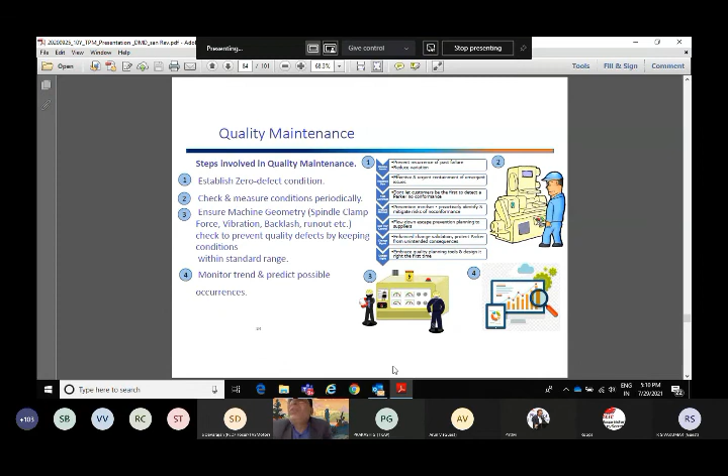Education and training is the seventh pillar. This is basically to provide multi-skilling of employees to keep their morale high and increase versatility, therefore reducing operation time, reducing repair time, and enhancing the skill of operators so they can perform their skills effectively and independently.

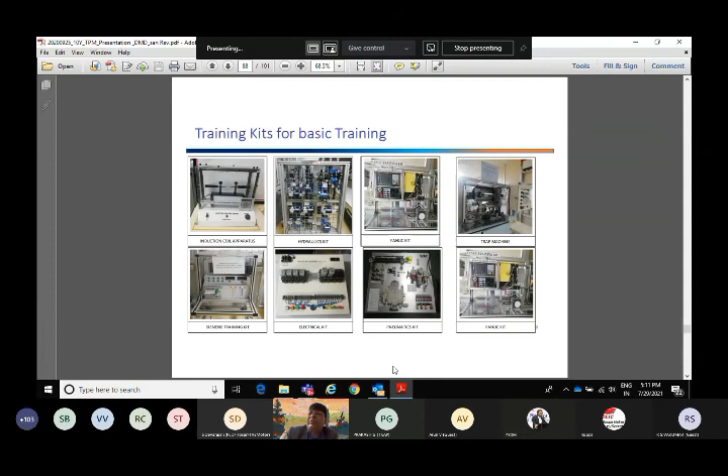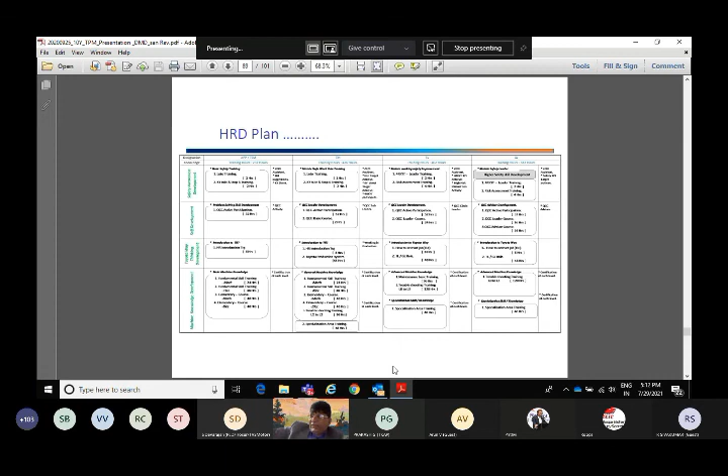So here we make a detailed training plan for various people. You can see the temporary support member, operators, team leaders, group leaders, and what kind of training on safety, self-development, Toyota Way, and member knowledge development. All these things are made systematically for their career, trained methodically.

Office TPM - I briefly touched upon addressing the 12 major losses: processing loss, cost loss, communication loss, idle loss, setup loss, accuracy loss, equipment breakdown, time spent on retrieval of information, non-availability, and correct status.

Gyokaku is a word meaning business reform in English. This covers Office 2S, Server 2S, and TIBP which is a problem solving tool. Any problem on the office side - purchase orders getting delayed, or administration documentation taking more time - we create an A3 paper, a problem solving paper. That is what we call TIBP, Toyota Institute Business Practice, or Toyota Industries Business Practice.

Server 2S is about how to store files in the server, how to have the shelf life of the server, how to retrieve the file, how to number the file based on department, what is the shelf life, then how to fix the capacity of the server - total memory capacity, 5000 GB or 3000 GB, beyond which files will automatically go to the dustbin. Office 2S is very, very important - this will maximize the efficiency of the work and people.

This is an amazing thing. We have been practicing Gyokaku for more than 3 years. The results I got were not only on the shop floor but on the office side too - purchase area, HRD, production control, logistics, finance, production engineering. We have reduced manpower by close to 30-40%, removed unnecessary documents, and standardized all the documents. I think sky is not the limit, let me tell you.

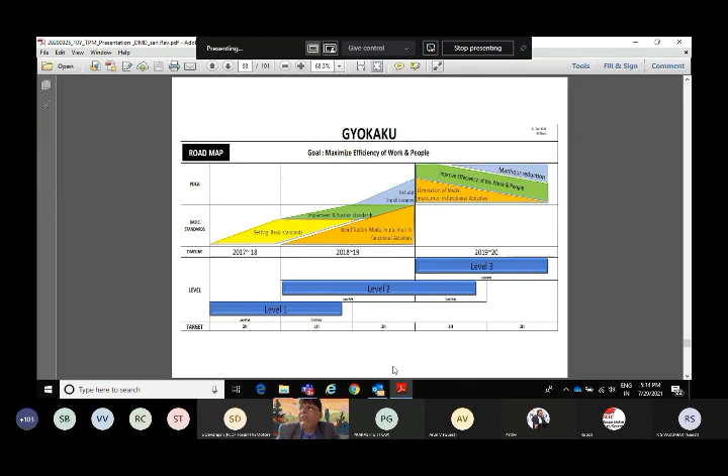On the office side also we have got close to 60% indirect staff across many departments. So the question is how to improve the cost efficiency and performance efficiency of these departments. Target is again put at the bottom.

So the TIBP reporting to lower level, senior level, and higher level, like that.

Next, organization starting from the top management. Manufacturing head should lead, supported by maintenance, with advice from experts. The maintenance manager should have a steering committee and functions like safety, health, autonomous maintenance, plant maintenance, focused improvement, early equipment management, quality maintenance, education training, and office TPM.

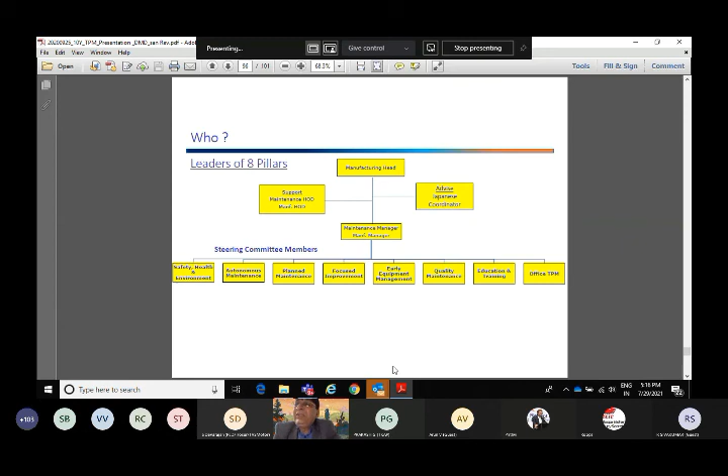Expected results: OA improvement, I am telling you, has gone from 90% to 97%. Minor stoppages drastically reduced, meantime to restore is now 22 minutes from 30 minutes. Meantime between failures improved from 900 to 1500 hours between every 2 failures.